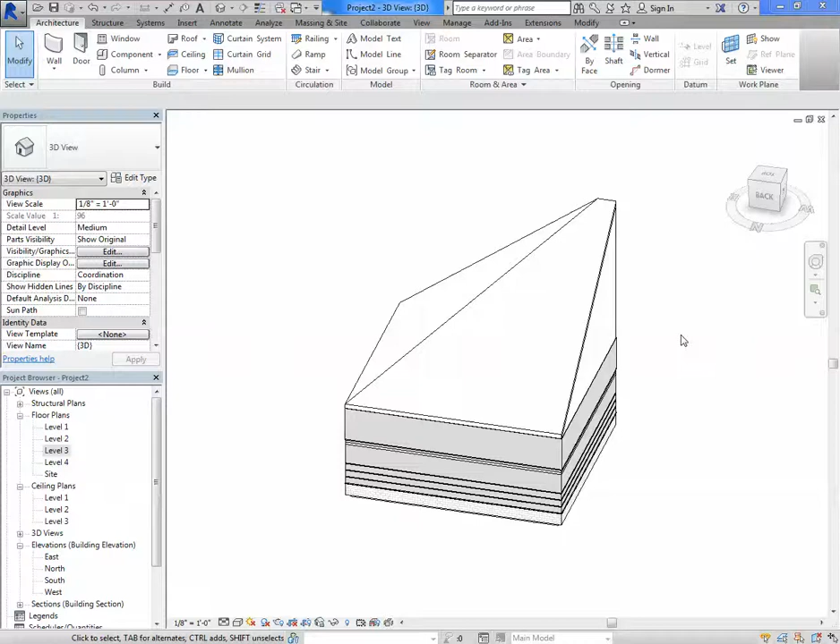Okay, so there is a problem here, as detected. Walls have many layers, and we'll see that actually right now. Some layers of this wall really snap to the roof, but there's an exterior layer here that did not.

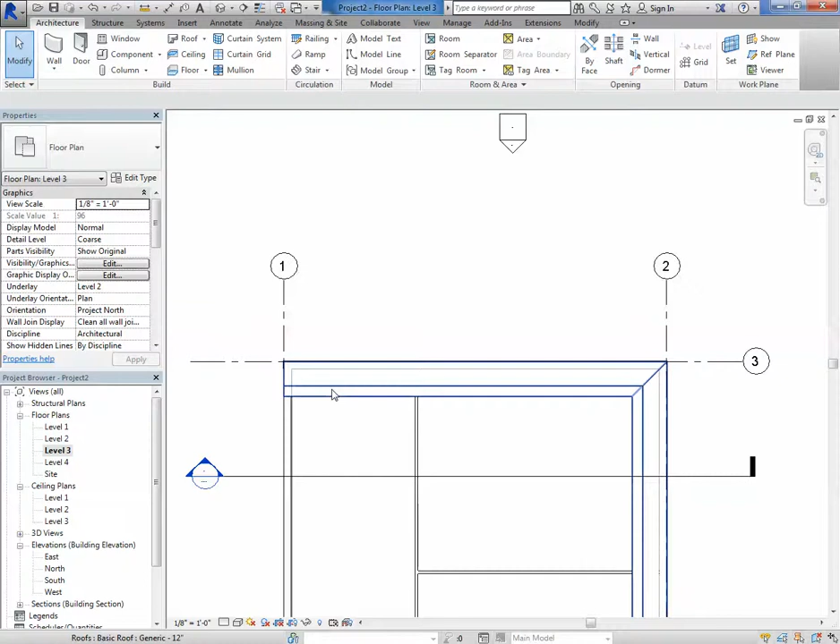The reason is that if I go to the top view, let's say level 3, select the roof and say edit footprint, we should be able to see that offset. You see there?

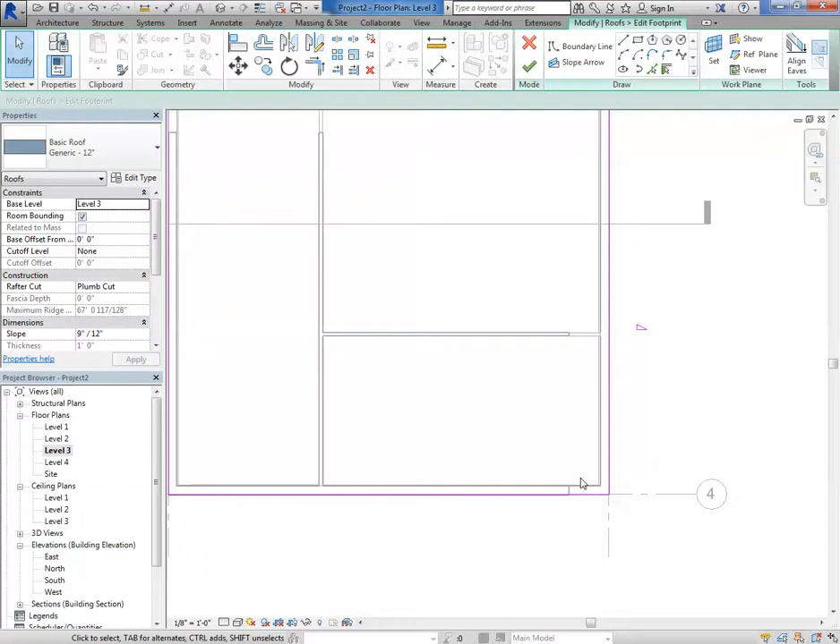That's when you should say MV as in move and start snapping to the exteriors. Now, this is obviously not a great job in terms of alignment to the grids, but if you say OK now, I could check around, see if it's OK around. It's fine. Say OK, 3D.

Let's see if we can detach. Still not there, huh?

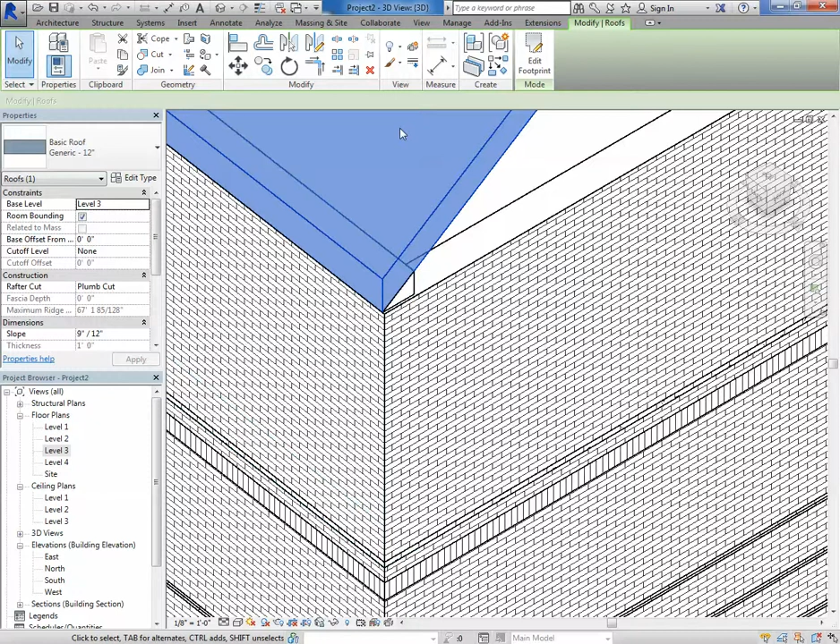So let's select that one again. Oh, it could be the other. Edit, footprint, move. And now you select, attach, roof, bah.

So it's all a matter of that little gap could create trouble. That actually is good news. That means that Revit is quite precise and exact.

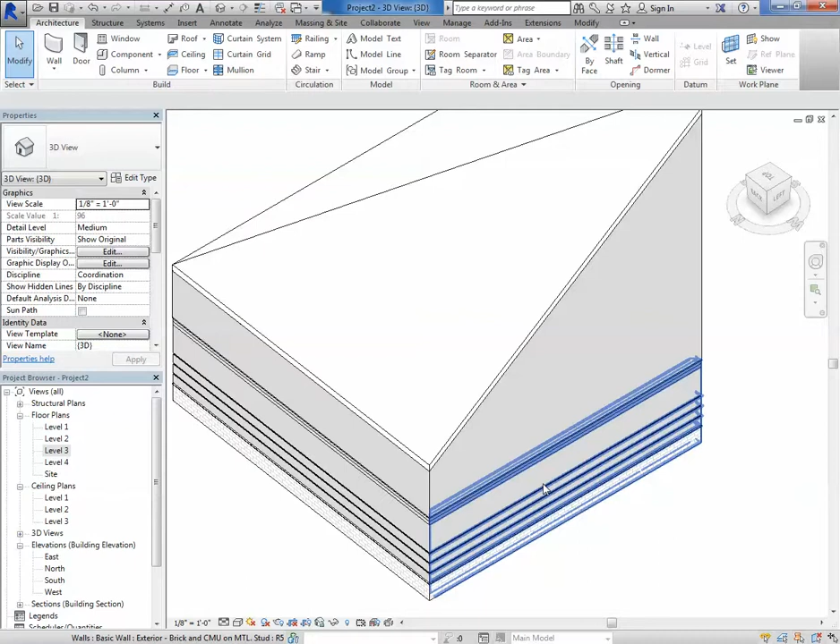Okay, good. Now, because it's attached top and base, I can select the roof, edit it again as many times as I want, create slopes, and it will follow along because it's attached. Somehow it has a memory that relates to the bottom of the roof.

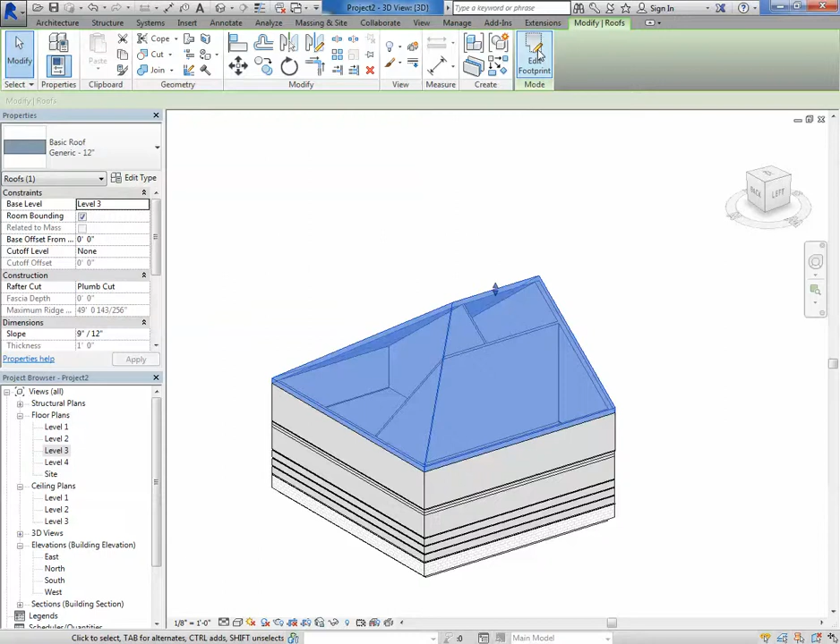Select, edit, select, define, and there you go. And not only that, if I go to wireframe and WF, all the interior walls, you see how they're snapping to the bottom of the roofs.

It's very convenient. There are other types of doing roofs, obviously, because not all roofs can be designed with slopes, as you probably are understanding now. So we're going to see later on other types of roofs, which is roof by extrusion. And then you can do a roof by face. That's a more sophisticated second step that we'll do later on.

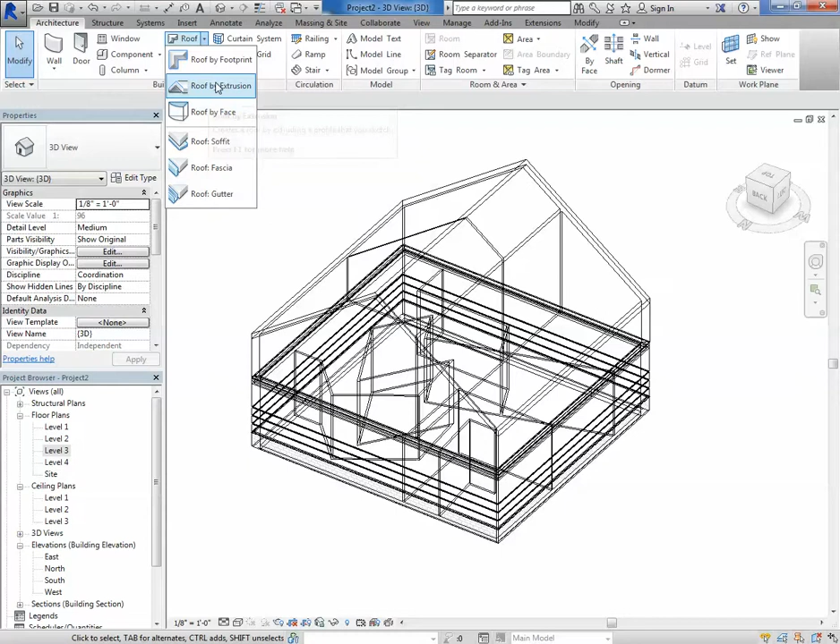Roof by extrusion basically is going to ask you where do you want to draw this. You draw a line and extrude it, okay? So I'm not going to do it, but you should definitely test it if you want.

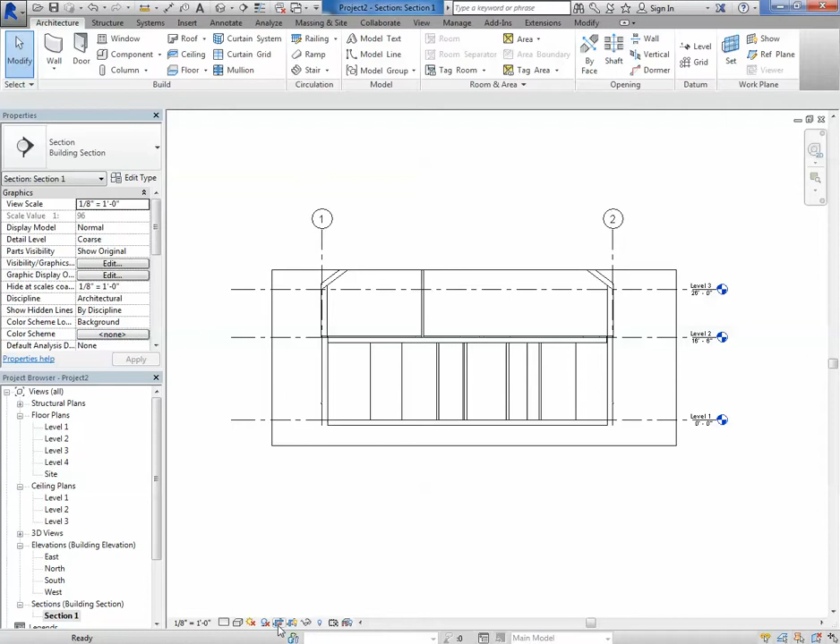Okay, so we have one section here. And here we have a classic issue with the cropping view. Remember that in the bottom we have either crop yes, crop no. But we also have see it, see the cropping line, and not see it.

So if you want to move that, everything moves. Okay. Good.

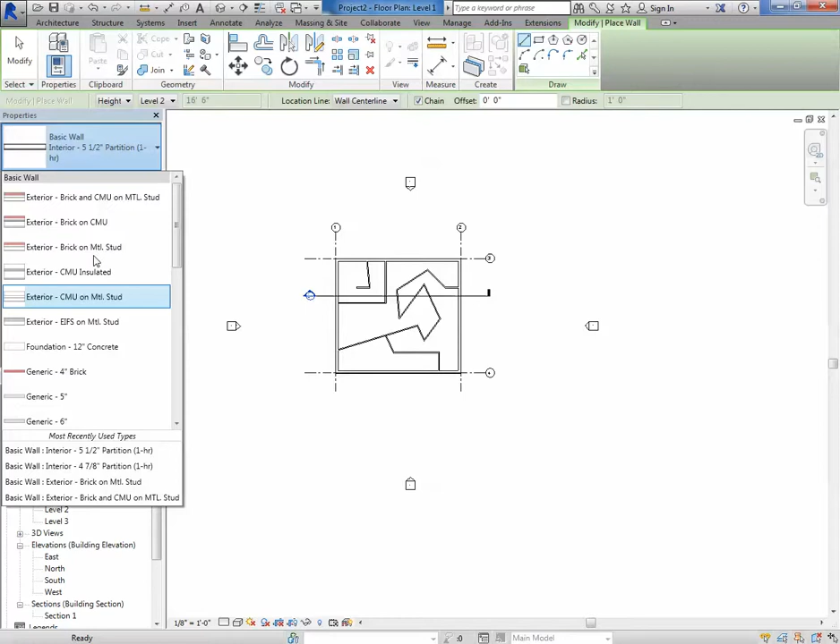Okay, just talking about walls, and very briefly, because there's many other issues about walls. You can say wall, and if you don't find exactly the type of wall you want, which is most probably in some complex projects, you probably want to start with the type of wall that is similar to the one you want, and then edit the type.

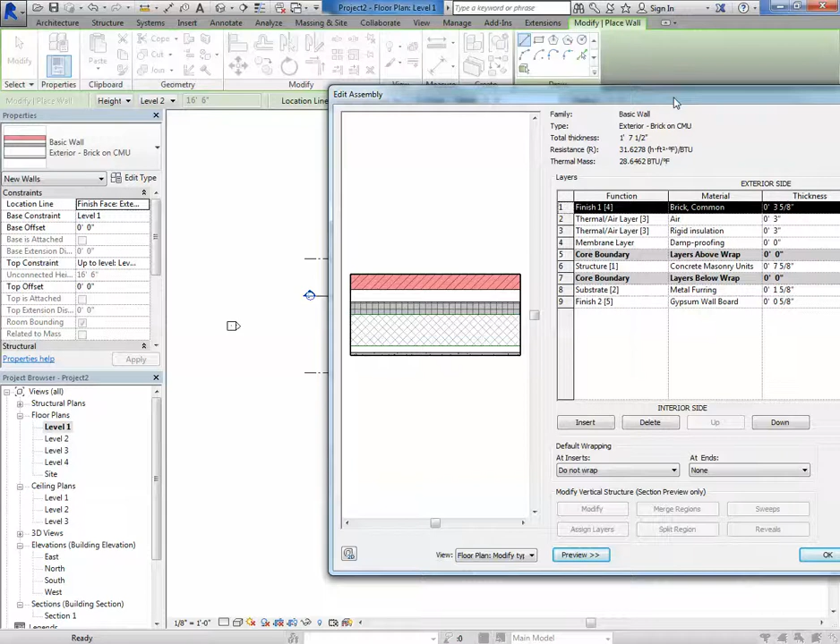Here's where you're gonna find all those layers, and we're gonna talk about that in a specific class only about that, because it's pretty much like partition types. So if you say edit type, and you press under structure edit, and you say preview,

you can get each of the layers of a wall and the representation of it right here. If you click there, it's going to even tell you what layer it is each time. It's telling you the thickness of that layer. It's telling you what it is, and it's telling you what the material is made of.

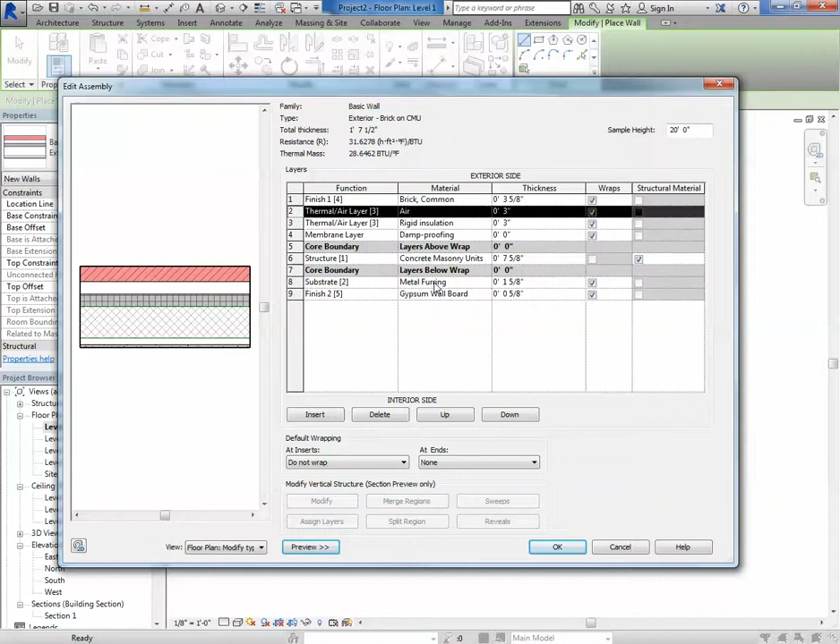Very, very important. Obviously, you can create any type of wall you want as long as you know what materials are for each of the layers. So I'm going to keep it there, but just keep in mind that you can actually create any type of wall and any type of floor, any type of roof. Anything that regards layering, you can create more layers or delete layers, change the thickness of the layers, and then create a type.

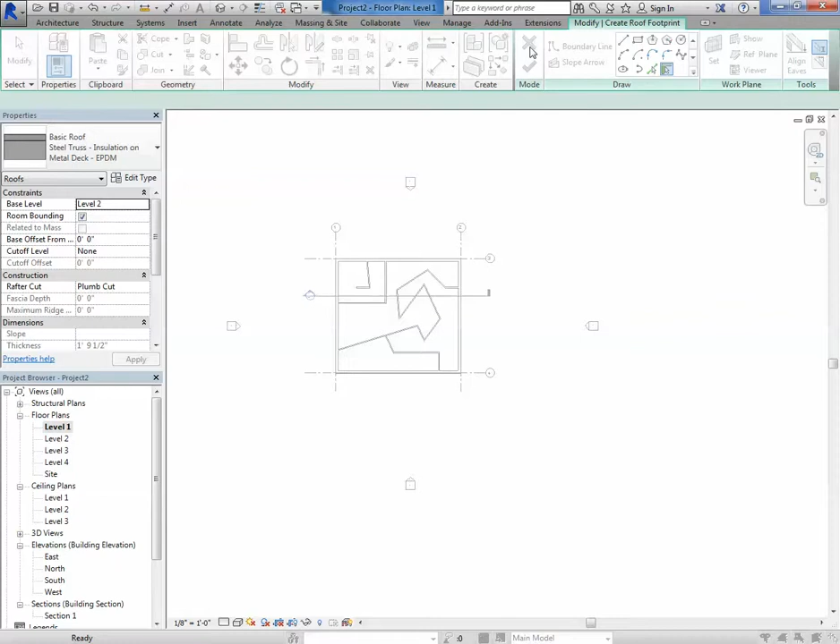And when you create, for example, your roof, you can select here the type you just created. Let's say you created more layers, and this is the one you use to create the roof you want. I'm going to say no, because that's what we want, okay?

I'm going to do another section. View, section, etc. You can double click and see that section automatically. Good.

Doors and windows. Doors and windows are actually expecting a host. They're hosted. They need a wall. They need an element to be attached to.

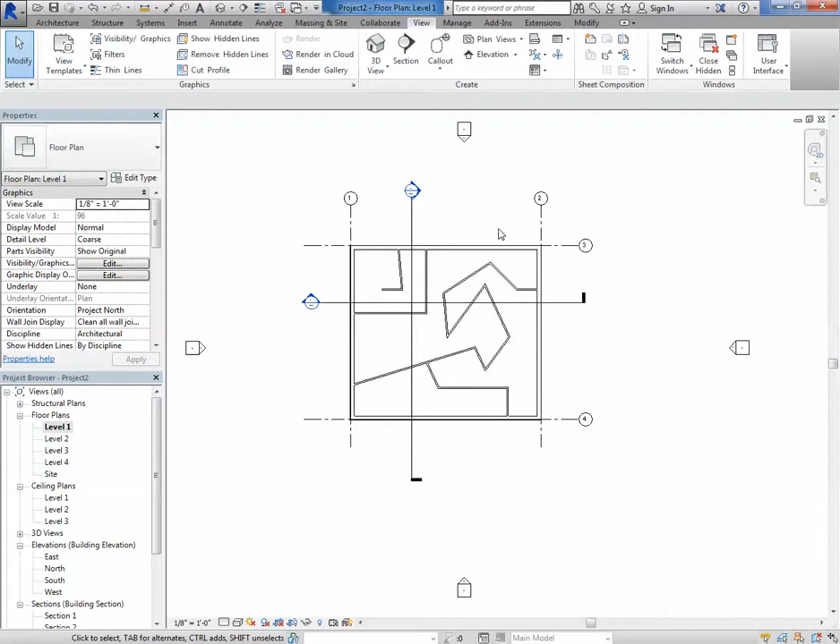So if I select under architecture window, you cannot place it in a grid. You cannot place it in an elevation symbol. You cannot place it anywhere but in a wall. When you get close to a wall, you can press anytime you want, and you will be able to place the window.

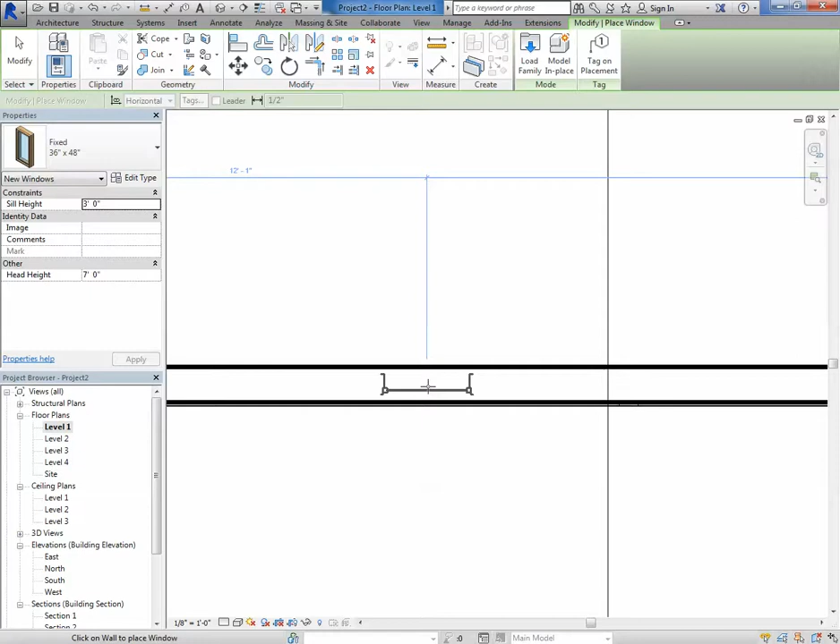But before I place it, make sure that you understand that you can place the window either towards the interior or exterior, depending on where you place it, okay? That is important. Then you click, and there is the window.

I'm going to go to the 3D, hidden line, and there is the window.

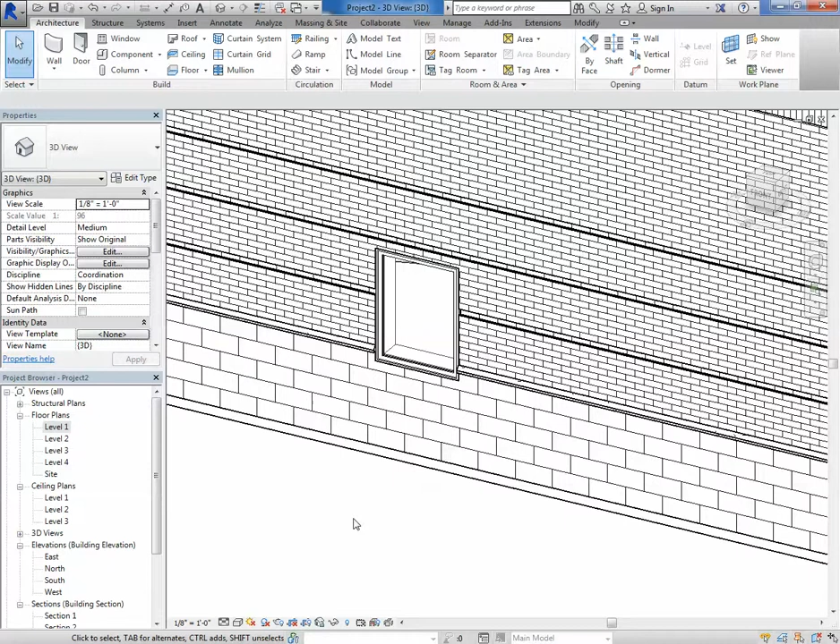A window basically cuts the wall, respects the wall in that area, and places a 3D model associated to the wall. Meaning if I move this wall, that window will move, okay? I can select the window and move it around, but I can also move windows and any other object by clicking on the number, placing 20, and it moves the window.

I'm going to do that little thing again.

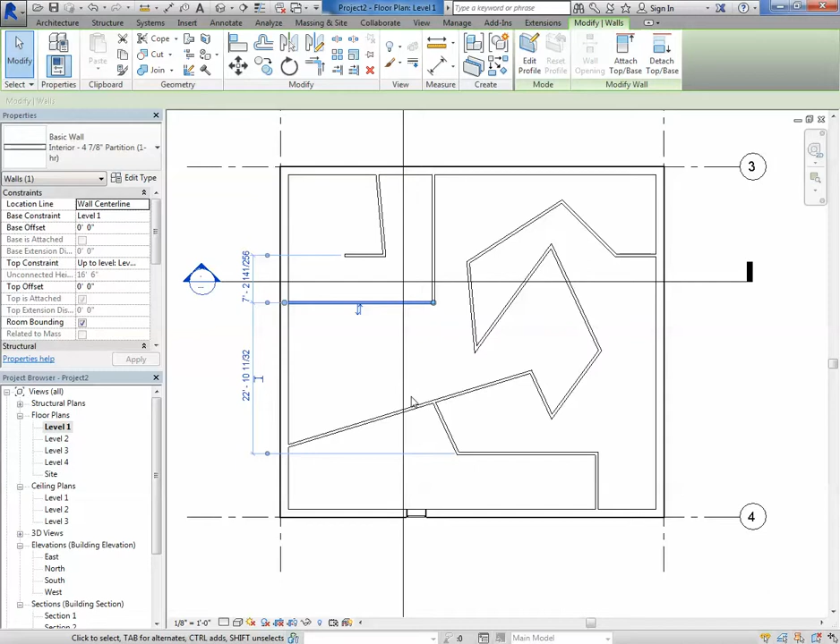You see when you select something, it always gives you more information than you seem to need. For example, if I select this little partition, it tells me its distance to the axis of this other partition, this dimension, and to the axis of this other dimension. That seems annoying at first, but it becomes extremely important. After selecting the object, you can select the dimension.

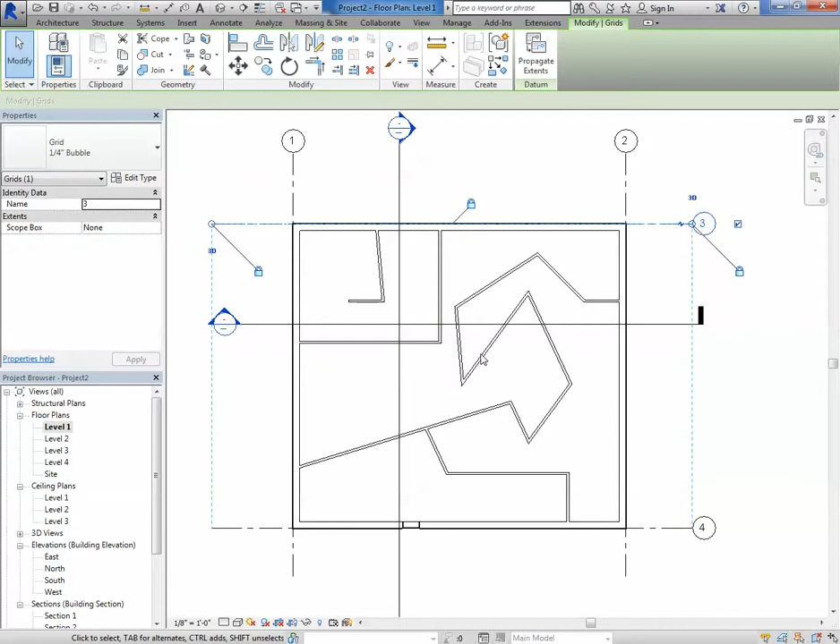And changing the number changes the object's position. That goes for almost anything. If I select a grid, it's going to tell me a couple dimensions and a couple other things. That also goes with dimensioning.

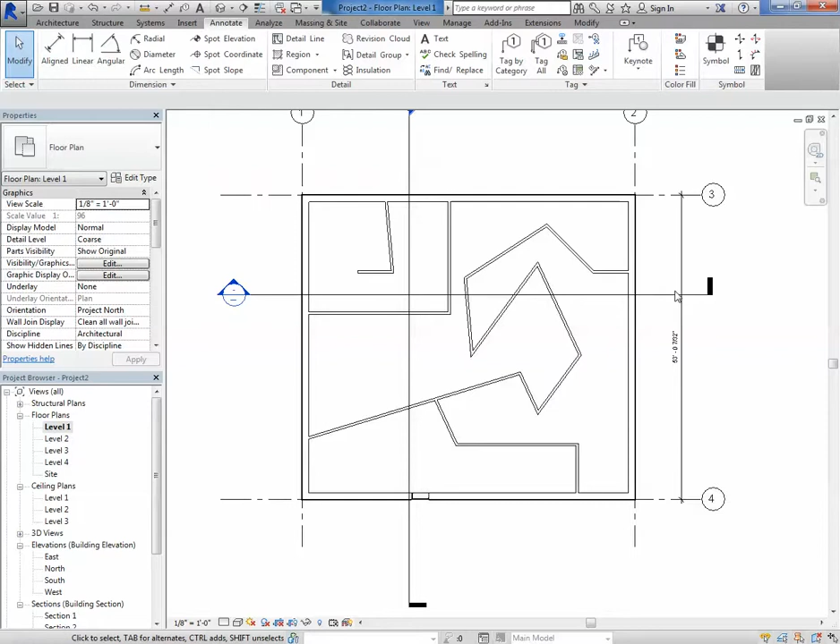If I go to annotate, and we'll see this next class a lot, you can say give me an aligned dimension between these two grids. You can use dimensions for more than just representing a dimension, as you do in AutoCAD.

You can select an object you want to change and select a dimension you want to change, say 50, and it changes the object. I'm going to do it again. DI is for dimensioning. I'll say that from the axis to the axis is 31, 9, and 5/8, and I want to move this wall so it's actually 32 exactly.

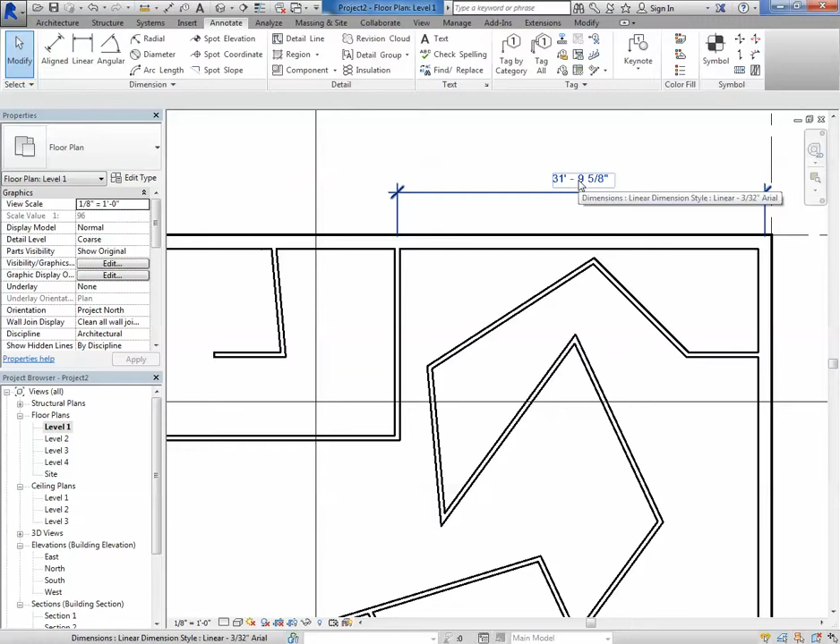Now you're going to get confused, and this is a very important moment to pay attention. If you want to move this wall by using its dimension, you cannot double click on the dimension directly. You can double click, but you won't change the number. You have to first select what you want to change, the partition, because I want to move it. Then you select the dimension and enter 32, and it moves the wall and changes the dimension.

I don't know if you get the logic, but basically dimensions are more important than just a representation of a dimension. It also allows you to change objects within your plans and your elevations, etc.

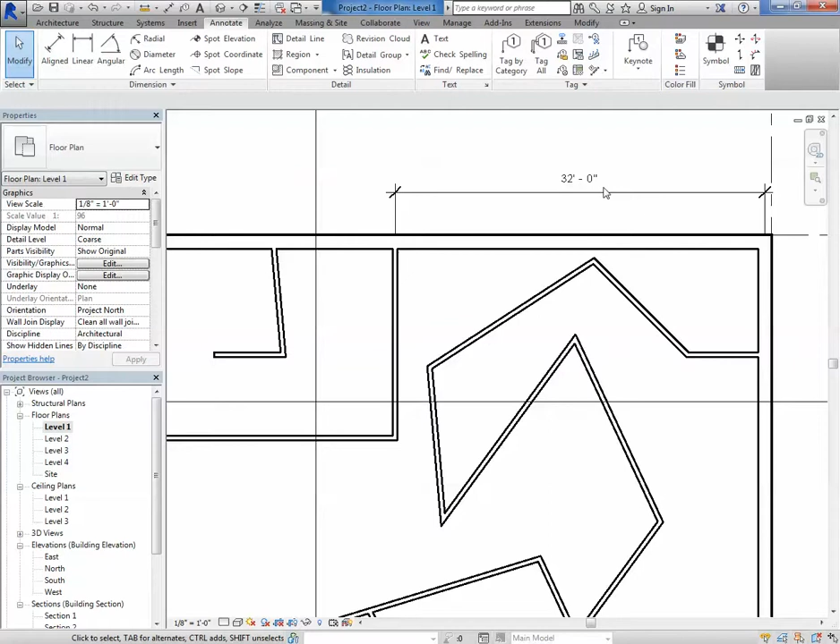Good, there's obviously many other features under annotate, such as leaders and all kinds of symbols, etc. But I'm going to keep it there.

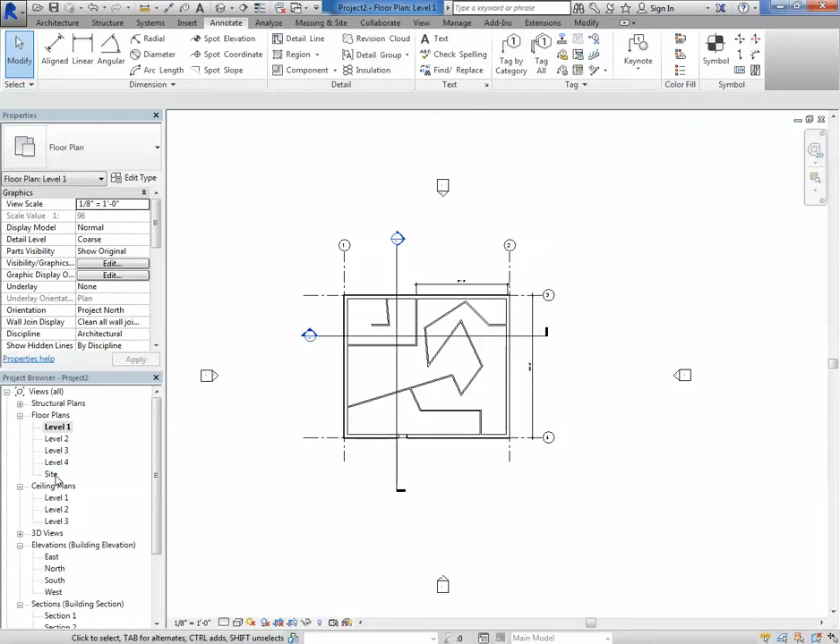I never did the terrain. I don't know if anybody had trouble with the terrain. You can do it elsewhere, but the best place to do a terrain is under the site. If you double click on site and go to massing and site here at the top, you have Toposurface, which allows you to place as many points as you want, and you can change the height of the points as you put them in to create slopes.

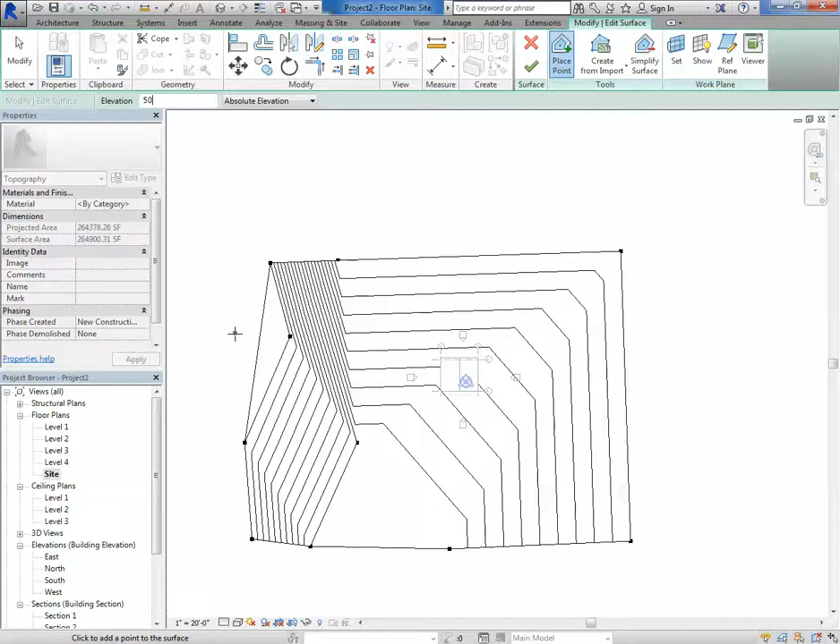You just say OK at the end, switch to 3D, and there you have it.

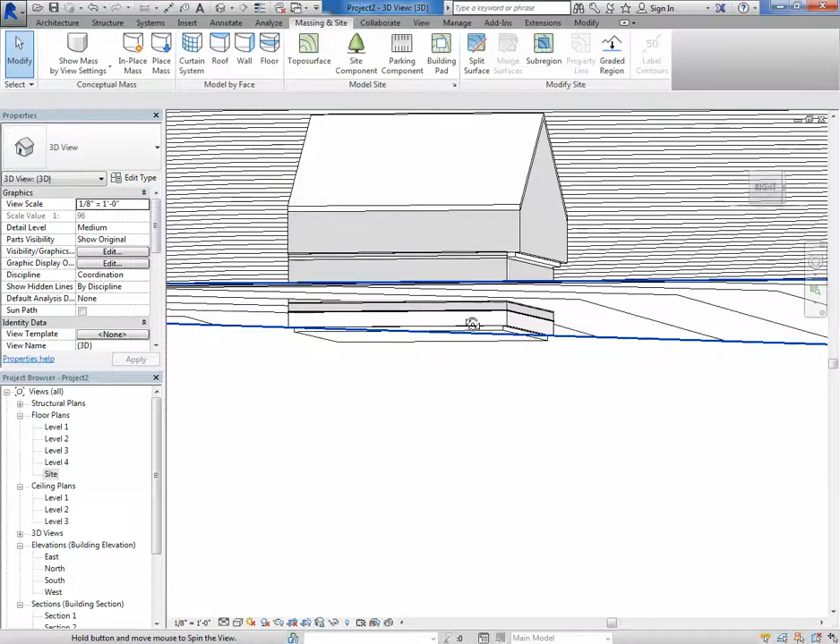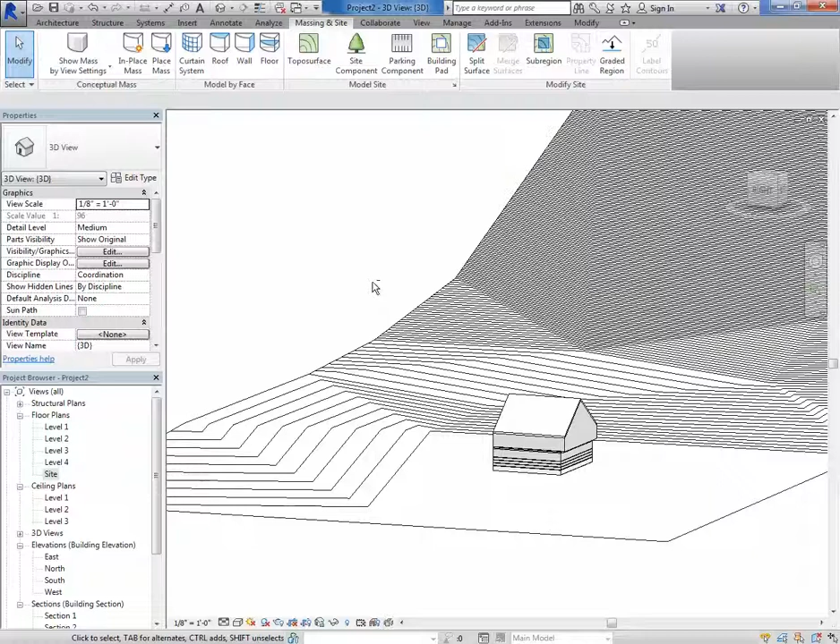So obviously, as you create the terrain, if you have a slope, the building is going to be crossing the terrain. So probably what you want to do—obviously if you have this terrain, you have to solve the architecture—but in my case I'm just going to select the terrain, edit the surface, and place a couple points. Place point at 0, and say OK, so I make sure the house sits properly. Otherwise, it's a matter of redoing your architecture for the slope you're working in.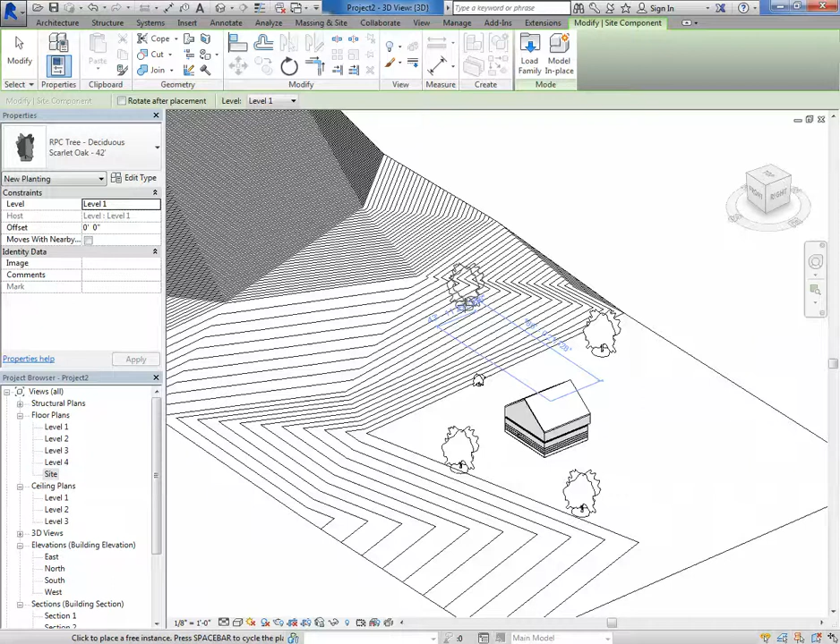As I said before, you also have components that you can add, like trees of different kinds. There are actually many other components and features you can incorporate into your site, and we'll see how you can load any type of component you want, which are called families. We'll see that in detail in another recording.

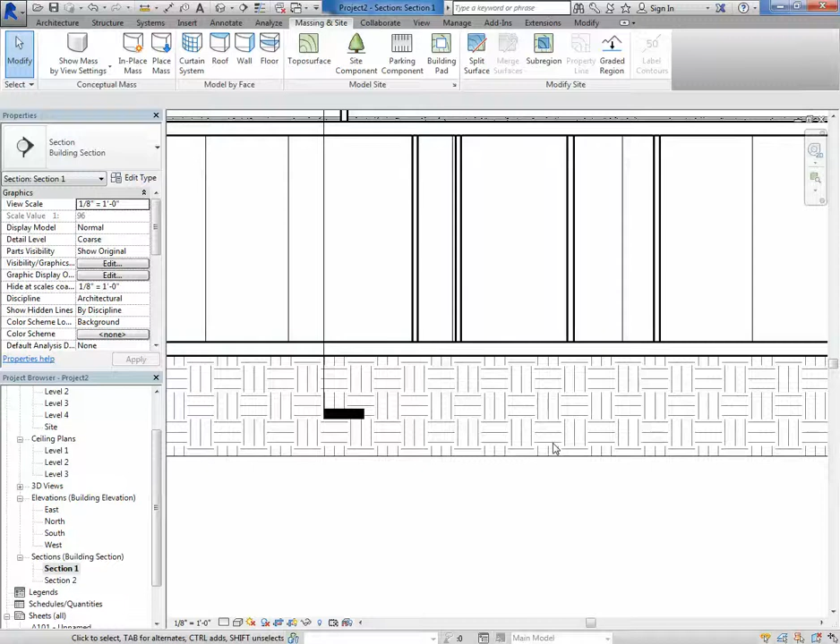Okay, the second you put in a terrain, you can go to sections and you get this hatch. It makes more sense than what we had before, I think.

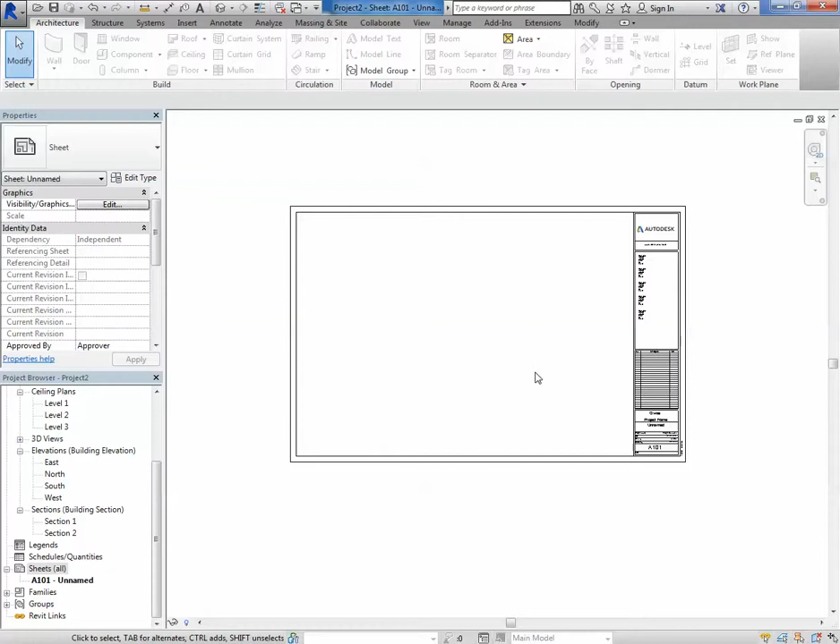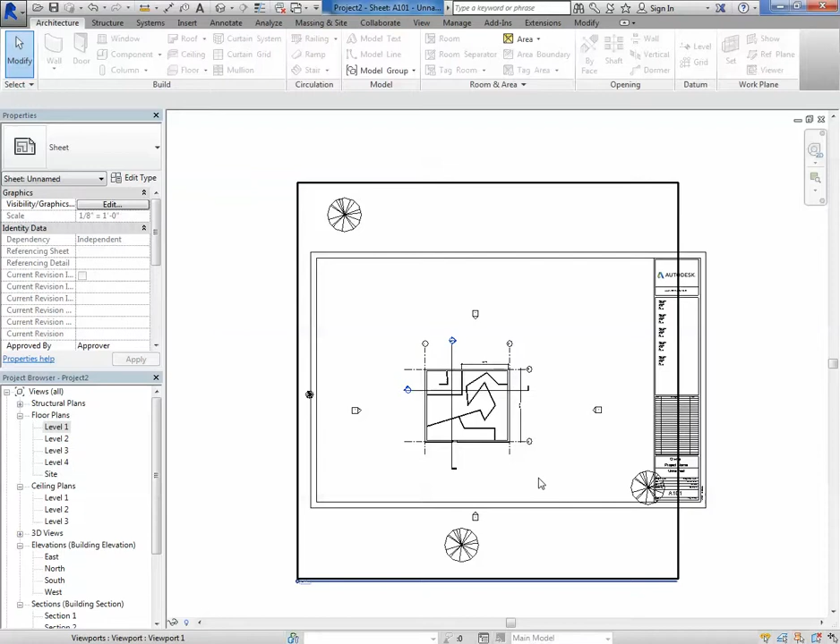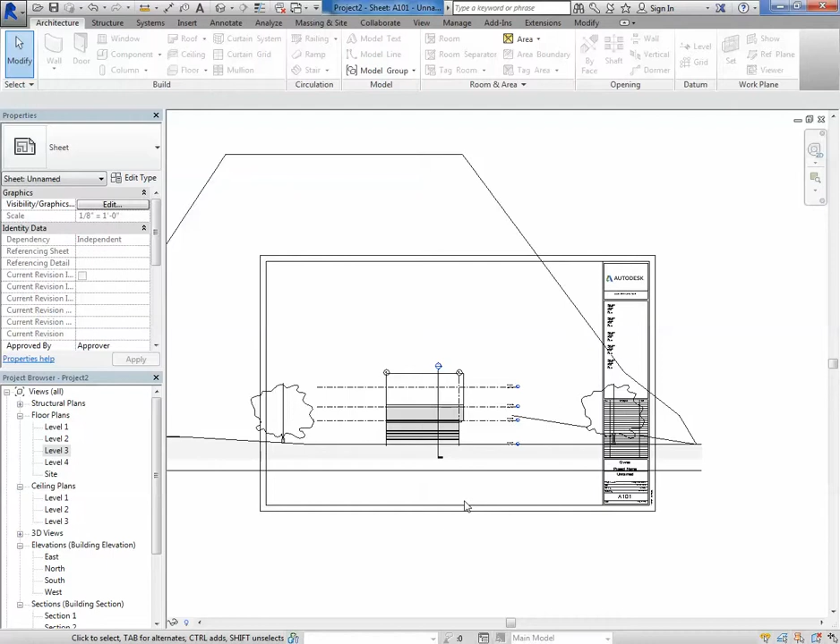Obviously, for construction documents, we're not going to place trees until we get to the end where we're going to render and so on. But again, it's very simple. You can also delete the window and drag in, for example, an elevation. You can drag as many objects or views into your sheet as long as they are of good scale and fit in your sheet, and you can tell the story of the house, meaning you represent the house correctly. You can do it as best as you can.

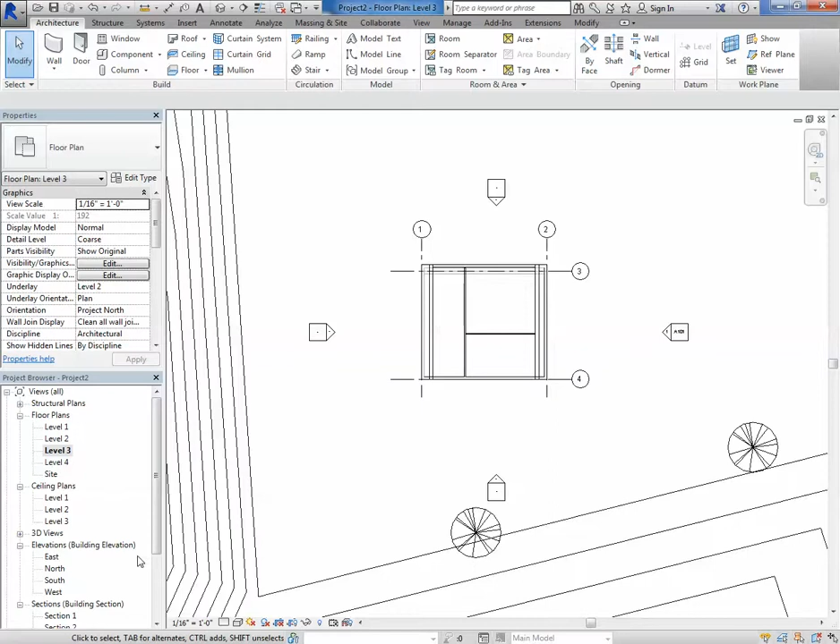Now, scale. Before you drag in a view, I recommend you go to that view and make sure the scale you're working in is the one you want to show in the sheet. So change the scale there, 1/16, for example. The scale matters, and it also matters what ingredients you have.